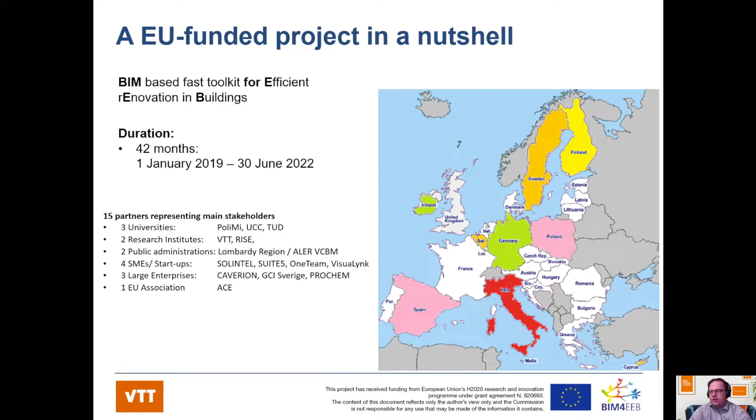So about the project, BIM4EEB in a nutshell. We are creating this toolkit, which is BIM based and aims at efficient renovation. We have been doing the project since the beginning of 2019, and it will end next June. So this is the final workshop

for this Finnish part. The whole idea of the project is digitalization of renovation. As said, it's a BIM-based toolkit, and tools will allow 3D digital models of existing buildings, utilizing that, and there is the common data environment, the BIMMS, in the background connecting those other tools.

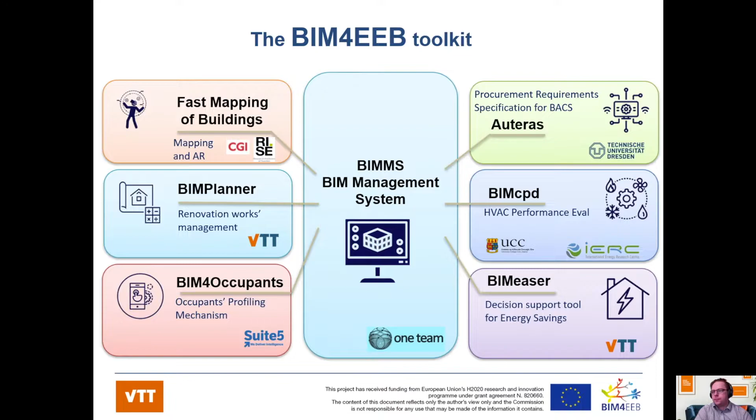So in the first phase of the project, that is the toolkit. We haven't used all of these in the Finnish pilot, so today we are talking only about the BIMMS, BIMPlanner, BIMeaser, and fast mapping toolkit. In the first phase, we defined requirements from the user's perspective, from different companies, and also defined the linked data and ontology approach used in the tools. Then in the second phase, we developed those tools, and the third phase was testing them in the pilot sites, one of those being the Finnish pilot, which we are talking about today.

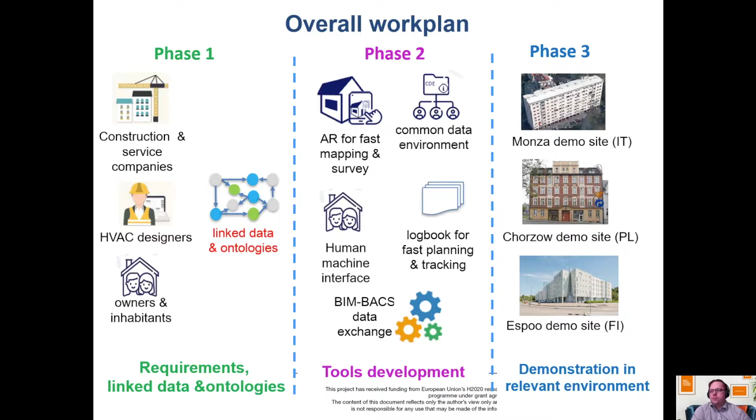And that would be my short introduction to the project. So then I would give the floor to Olli, who would tell us something about the Finnish pilot.

Hello, I'm Olli Nummerin from Caverion, and I hope you can see my screen now. Sorry for hassling a little bit with my buttons. I will tell a few words about the Finnish pilot site.

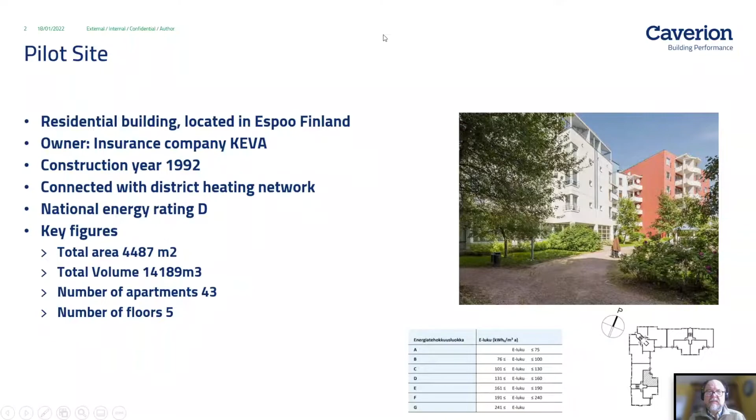So for the pilot itself, our objective was to reduce primary energy consumption by about 50%, and to do that with minimum action, so with minimum cost and only the necessary things needed for that. In practice, we decided to install an exhaust air heat pump.

That's the system where, in this kind of building, we have exhaust air collected at the roof of the building, and the new system is recovering energy from that air, which is constantly about plus 22 degrees all year round. In Finland, that's a big advantage compared to the traditional heat pump, because during winter time we can recover heat from indoor air, but not from outside.

And that system runs in parallel with district heating, so we can use district heating still during peak demand and for domestic hot water, but for the heating we are mainly using the heat pump.

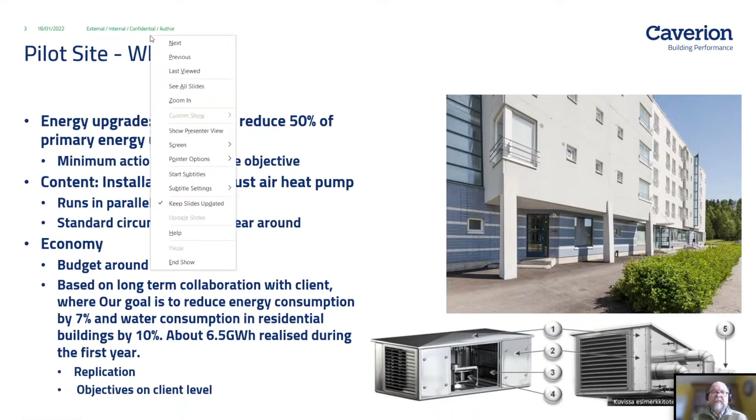And for the source data, we started to find documents for the building - typically there's drawings, original drawings. It's a pile of paper, and that was the case in this building as well. We created an IFC model based on the original drawings and modifications that we provided for this building.

This IFC model is used for the toolkit in this project, but we use that information for visualization and for energy analysis as well, so it's not only for the project but for some benefits for traditional work as well.

The data that we are getting there - we know the energy consumption. We have been tracking that for a long time, so we can compare what happens after a renovation.

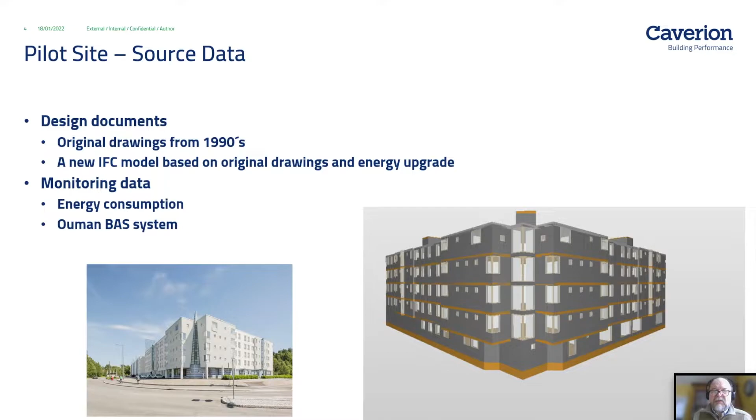So that's the pilot building, and I'm happy to answer questions if there are any. Thank you. Perfect.

We start with the BIM management system. The BIM management system is the core of the BIM4EEB project in terms of managing the data that is inside the project and integrating the tools that will be presented after my presentation. The main goal is that optimal information management is one of the biggest current challenges in the construction industry.

We also know that the amount of data generated by a building asset during its entire life cycle is massive, and this could be an issue and could hinder strategic decisions. With this in mind, a common data environment, or CDE, works as an agreed source of information, which can help to collect, manage, and disseminate all the information through a managed process for the entire building.

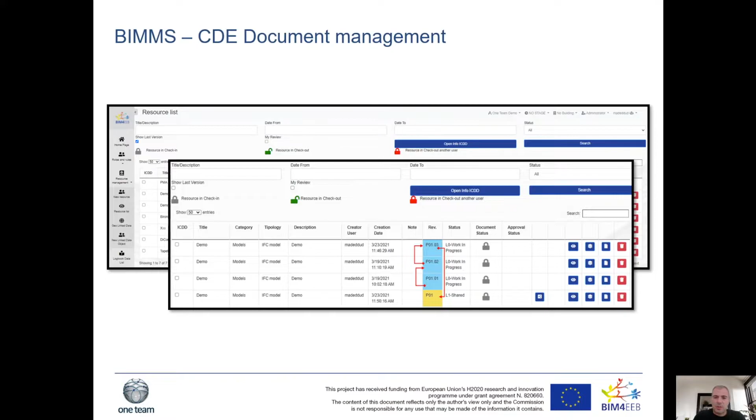We have a lot of functionalities that allow sharing data with other users, tracking changes through revisions, tracking changes of document status, and being aware of the models. As you know, BIM processes are very important, and the BIM management system supports BIM.

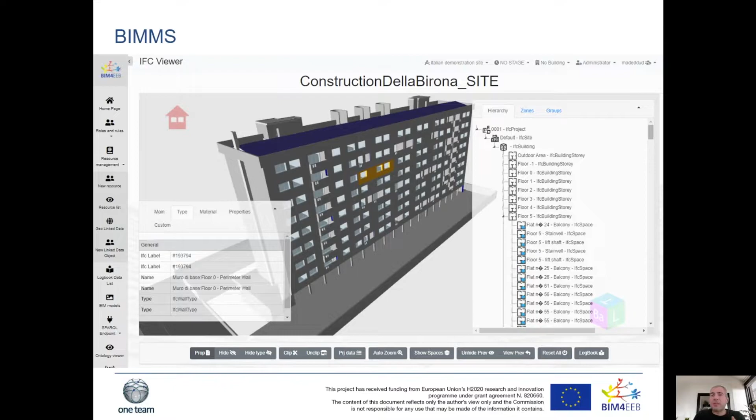It also gives a BIM viewer that allows users to see the building and navigate through the hierarchy of objects and elements, see the properties, and see all the data that could be attached to these items.

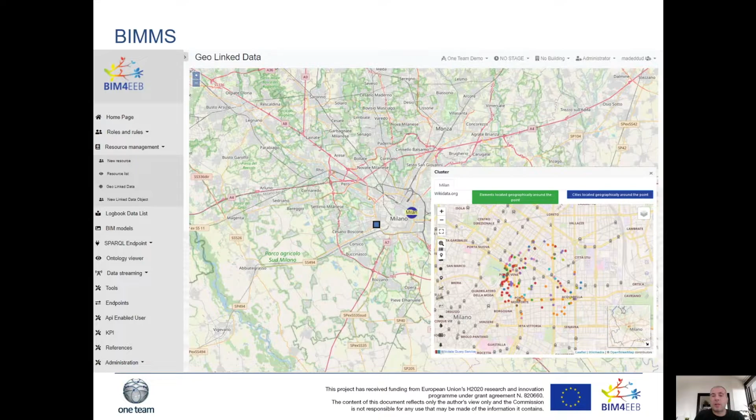Another important feature is seeing where the building is located, but also where all the resources of the building are located. These are components of GIS technology, so we can see the data in terms of geographic location, and also see, as we'll see in the next slides, how this data could be connected to other data.

IoT information, for example the temperature inside apartments, could be seen there. Obviously there is a private system so not all users can see the data coming from the apartments, just the users that have permission to it.

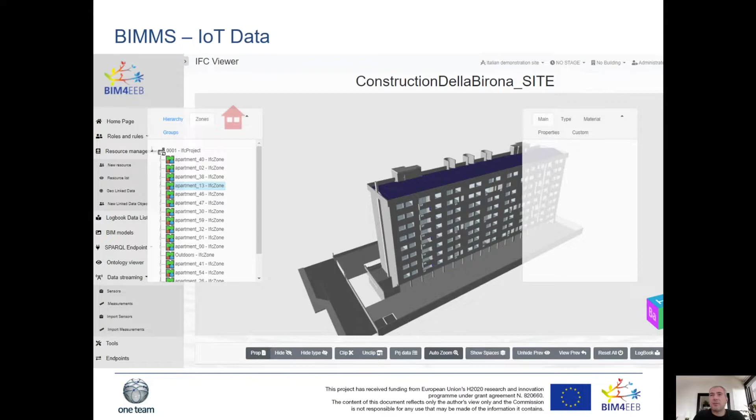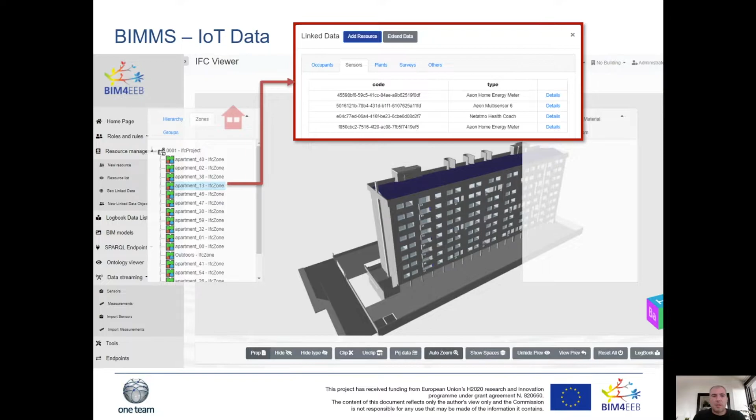This data could be seen as tabular data, but also in an easier way, where you can select the apartment and see, for example, all the components of the sensor measurements at a precise time.

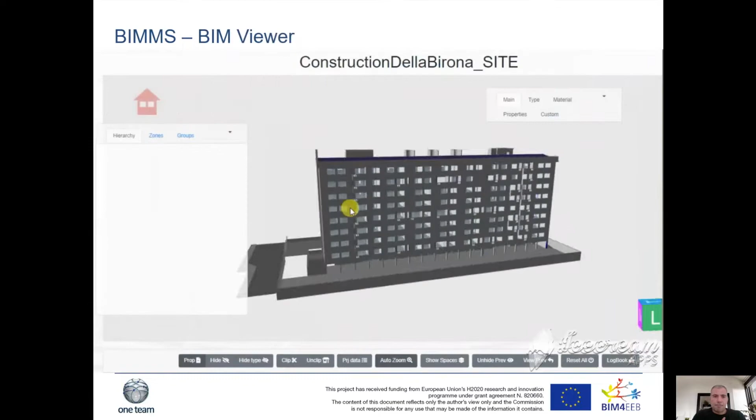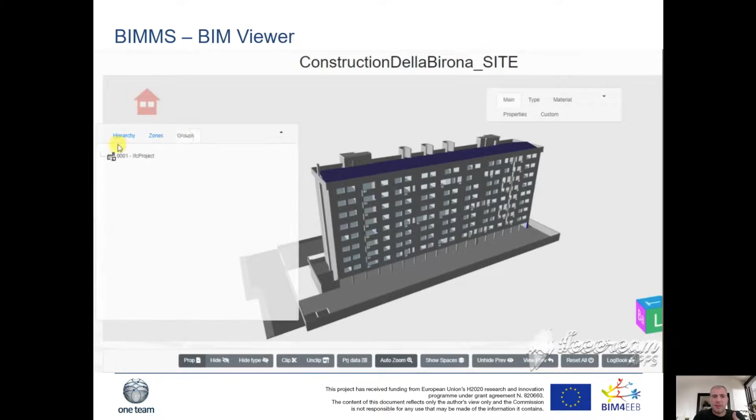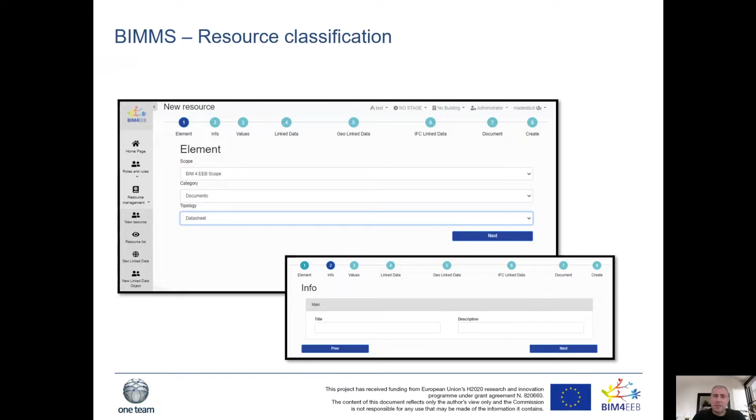Another important thing is that the user can navigate through the model and see all the information needed. This is right for the design phases, but also for the operational phases. If you are, for example, a real estate manager, you can check how the building is doing and how things are going.

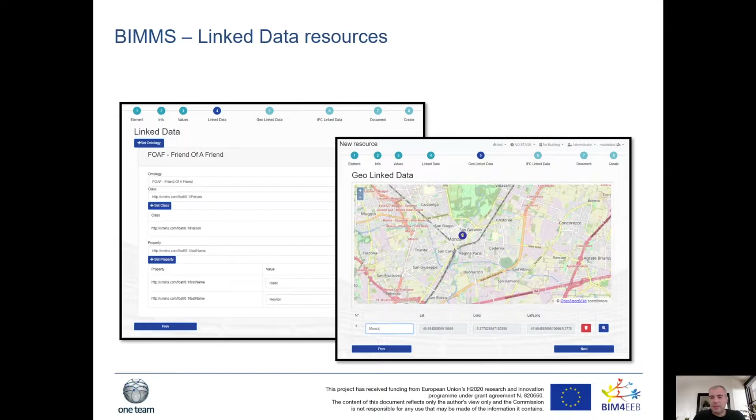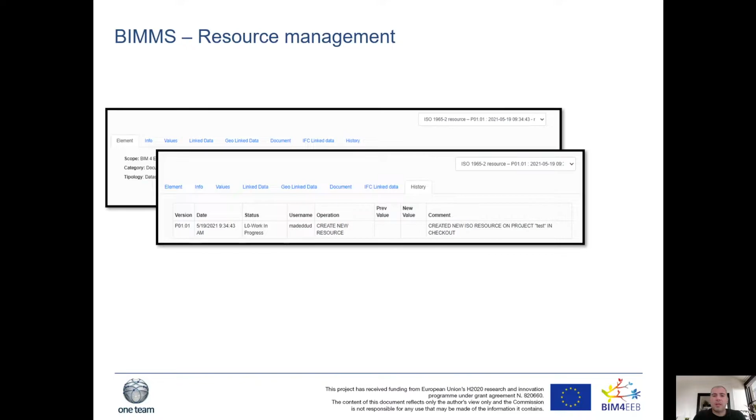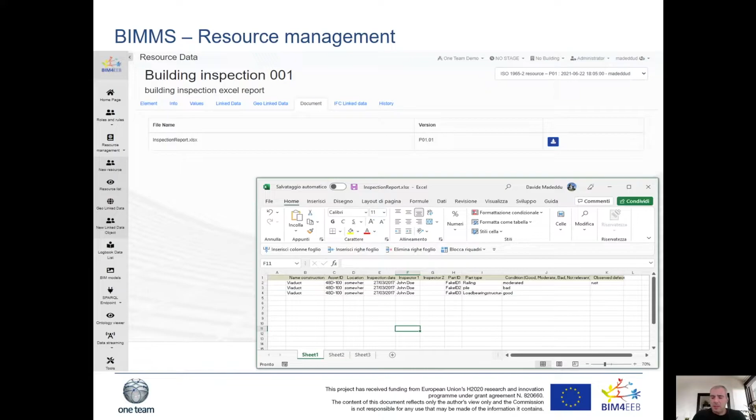We have a classification system that helps find resources, and some functionalities linked to linked data resources. There's a special feature that reports linked data functionalities in-house, and some things related to the data associated with documentation, any kind of document that could be stored inside the system. Obviously there is also a connection between some of the most used applications among professional users.

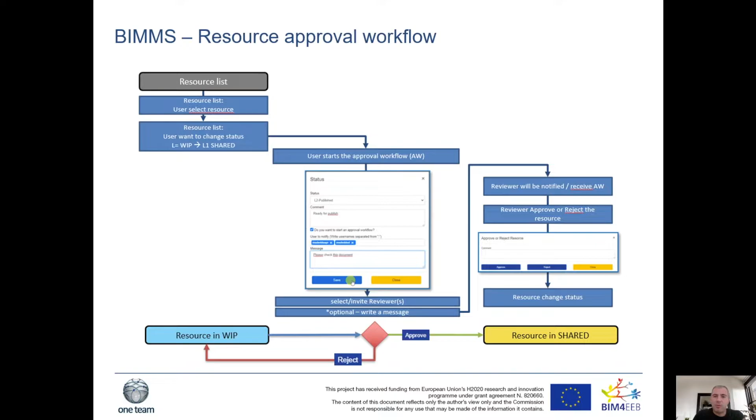Another important thing is that information is most important, it's important to take track of changes, for example the approvals in one document, to see the step-by-step evolution of the documentation, and collect the feedback, collect the approvals, if a documentation is ready to be shared with any other.

Another important thing is about the building logbook. This is important, especially for managing an operational phase, when you have to check all the data of your building in time, historically registered or recorded in the database, to see where the changes are. For example, when you change the last heating equipment, this data could be stored entirely in the BIM management system and can be shared with the people that are interested.

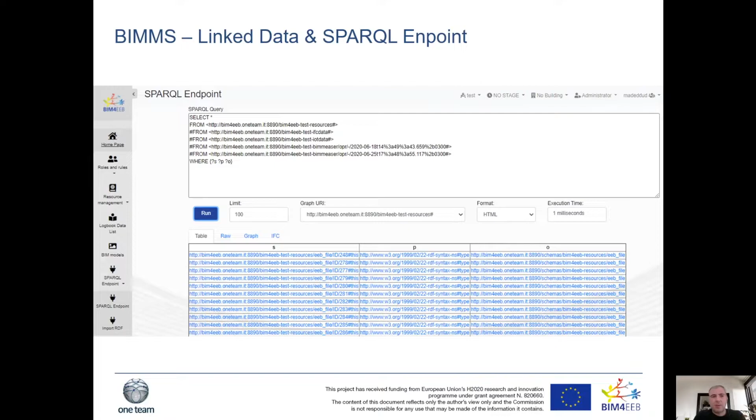All the data could be searched in a special case using linked data features, and especially a SPARQL endpoint, which is a very powerful system to check the data about the linked data. One of the most used and precious features of this functionality is that all the data you can store in the system can be connected and linked with external resources.

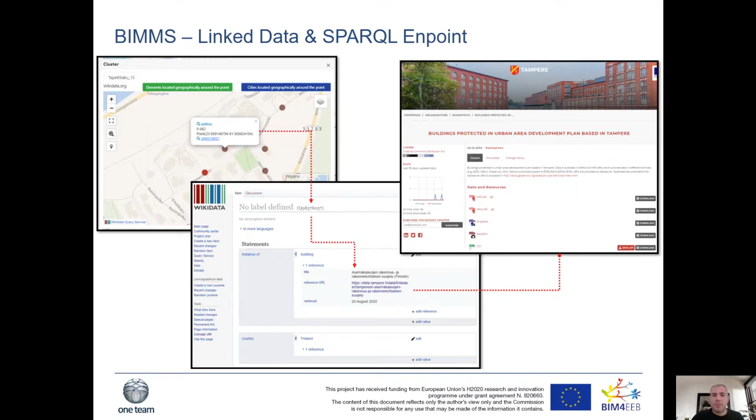For example, for the city of Espoo or Tampere, or any location present in the BIM management system, you can search for any other information that could be useful for the building. For example, you can see which buildings are near your building and if there is information available to recognize something interesting for your building. This could be helpful for designers, but also for any technical leader working on your building.

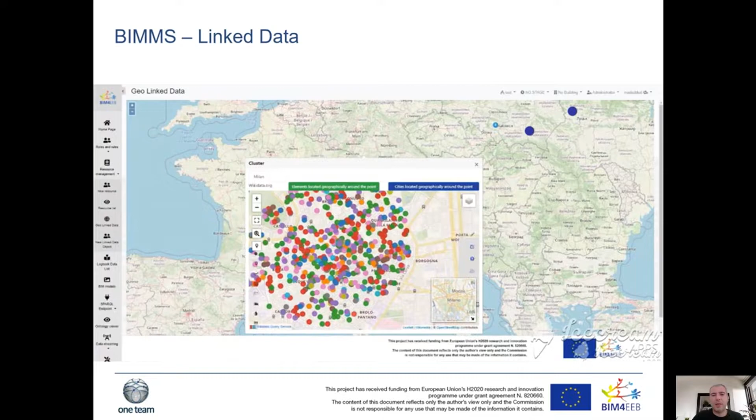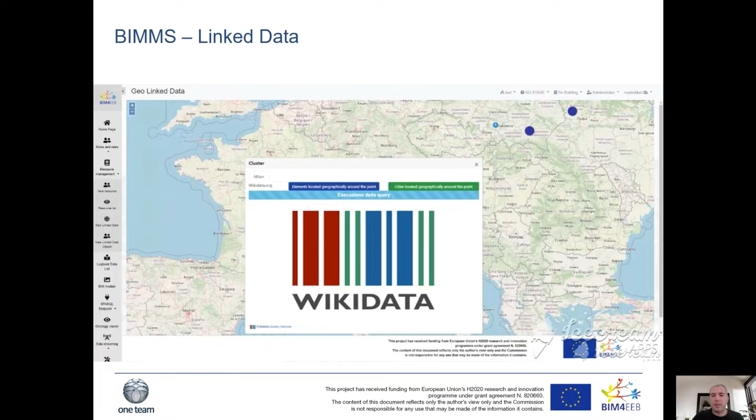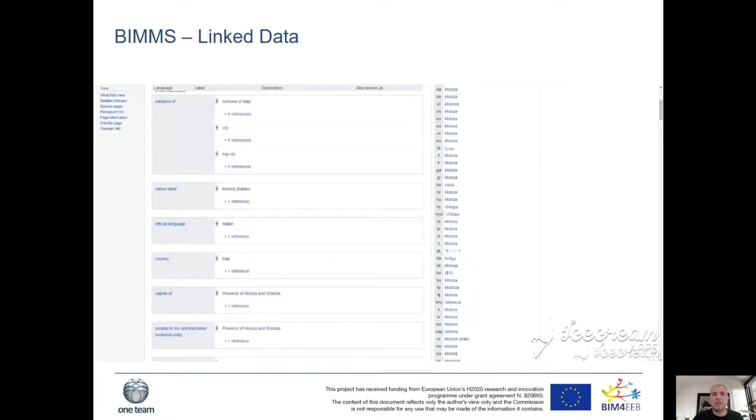A practical example of this functionality is located here, not as a video for the Italian demo site, but it could be applicable for any location stored in the BIM management system, where you can see that your building could be in Milan, for example, but you can see other buildings, other information available near our building within a circular kilometer radius. This information could be reached from other resources, and it could be something we can call augmented information for the system.

Just one last thing, so as not to go over too much in this presentation: we have some functionalities where this data is stored in the BIM management system but is available for any other tool. We have an API that could extend and integrate other tools inside the building management system, and this allows data exchange between tools in a way that is much faster than before.

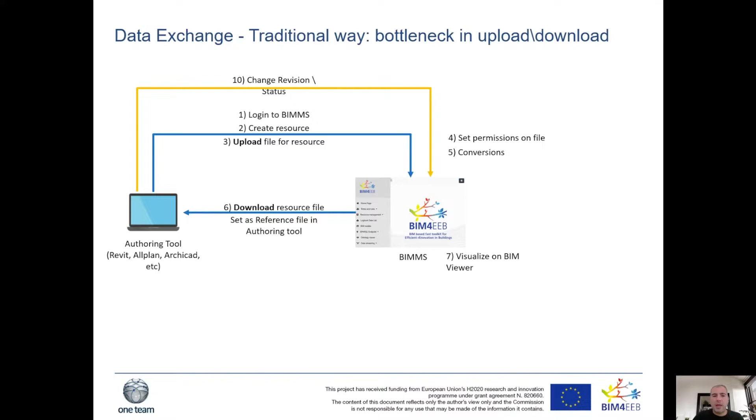A bottleneck in the process is so much in upload and download features, documents, and so on, which could waste time for designers and every professional working on documentation of the building. We created a system where you don't have to exchange the same file every time, but you can just upload your resources the first time and then just integrate only the data.

For example, if you have a building model in IFC, you just have to upload your BIM model the first time, and then if you have to change something in the data inside the BIM model, you just use the API to update the system. This can be a very powerful system that reduces operating time on your model by about 17%.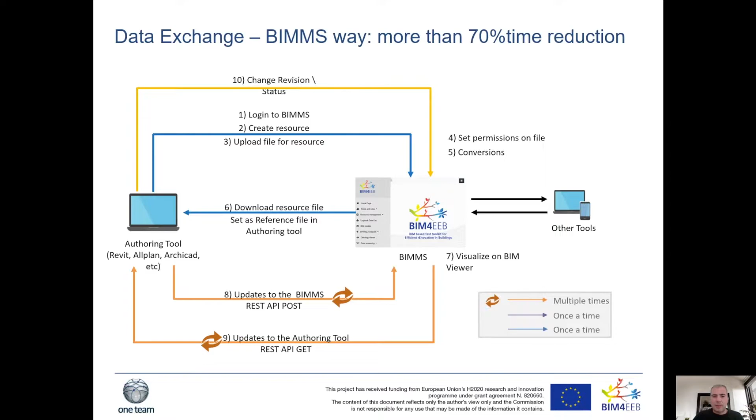And then I don't know, Teemu, if I have some more minutes to spend on that.

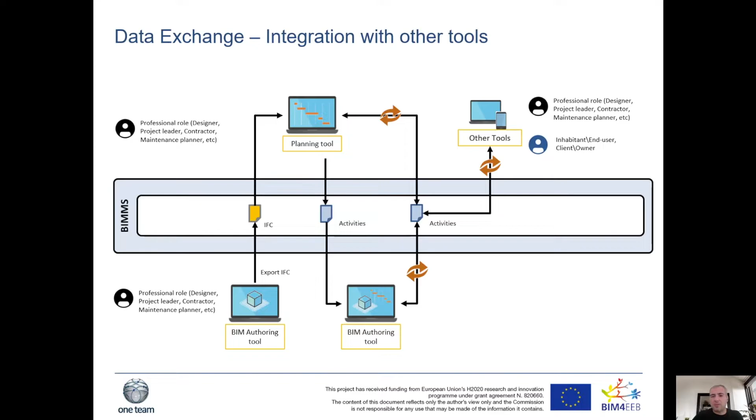The other slides are about this kind of process that the BIM management system allows, to exchange data between tools. The next tool you see in the presentation works with the API of the BIM management system and can exchange data with it. It's an integration with the most common tools used by professionals.

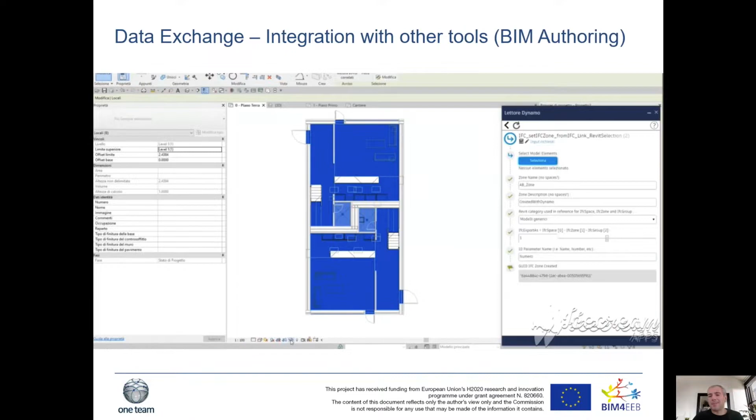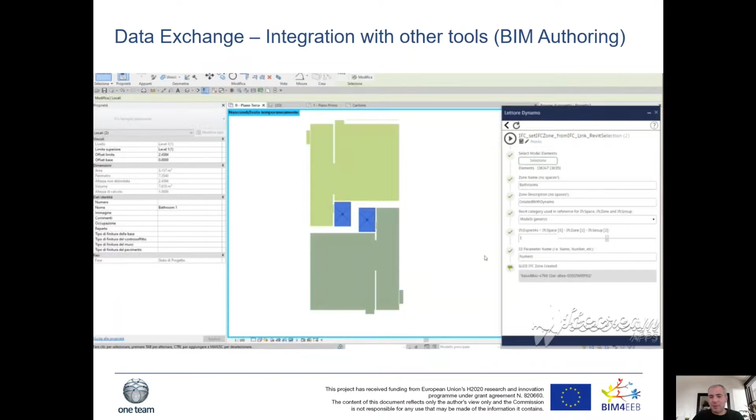And yes, this is my last slide. I hope I gave a good overview, a good presentation of the BIM management system. I leave the stage to you.

I will, can you just... Yes, I can see it. There I am. I'm from Sweden, working at the Research Institute of Sweden, and I will present today the part in this BIM tools which is called fast mapping tool.

The object and goal of this tool is to more easily obtain documentation of the construction of an existing building, and also get more information than you normally have when you create your 3D model and have the geometry, some construction parts, and so on. When you have this 3D model with more information, it's easier to understand the construction when you see it in the 3D model.

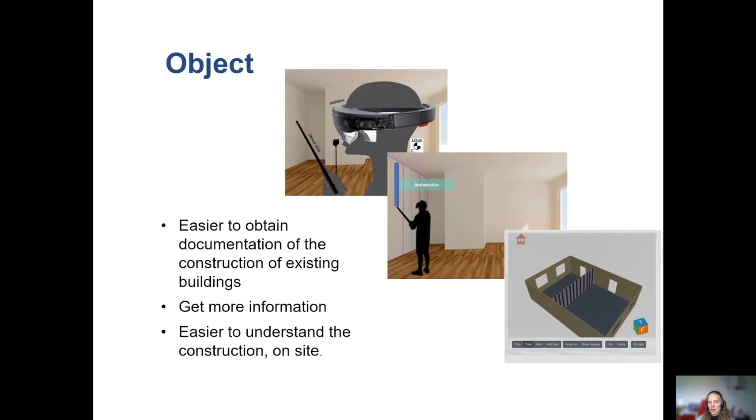So how does this work and what is it? The first step is that you scan the apartment or room with an ordinary laser scanner, as you see in the first picture here. This laser scan creates a point cloud, as you see in the lower picture. This point cloud is, because it's dead information, just points, the computer doesn't know if it's a window, a wall, or a floor, or what it is.

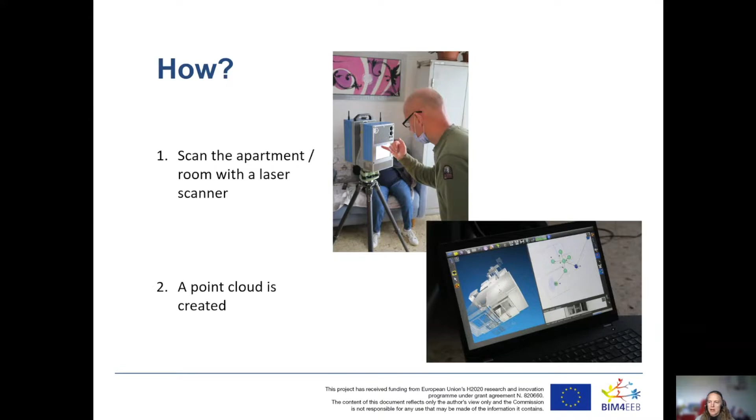And there the toolkit comes in.

Because when you have this scan and you have the point cloud, then you can put on AR glasses, augmented reality glasses, and upload the point cloud into the glasses. So when you put on the glasses, they're transparent, so you can see the room, the apartment, and then you upload the point cloud, and that's what you see in the lower picture here.

You can see this is a wall with a channel of cables. To the right in the picture, you see just the wall. To the left, you can see it's a point cloud together with the real wall.

When you have this point cloud in the glasses, then you can very easily add with your finger and define what is what. So you can point on the wall and say that this is a wall, and you can point on the corner in the floor and say that this will be a floor, so that the computer knows what it is.

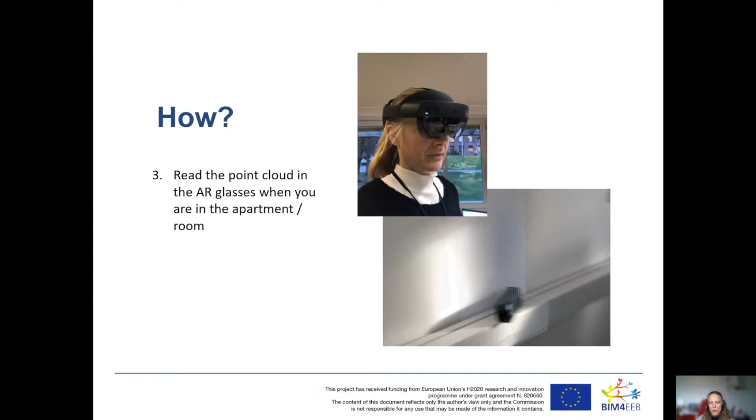And then you have another thing, which is the one I like most, I think. It's when you have this, then you can connect what we call a sensor stick. This is developed in the project, so this is nothing that exists on the market at the moment. This sensor stick is like a normal sensor.

For measuring moist - you know, when you detect the studs and moist in the wall, it measures capacitance, inductance, electricity, and temperature a few centimeters into the wall.

The good thing with this is when you sweep this sensor stick over the wall and have the glasses on, you can see this little screen or layout in the glasses. So you can see what the sensor stick detects - whether it measures high capacitance, inductance, electricity, or temperature.

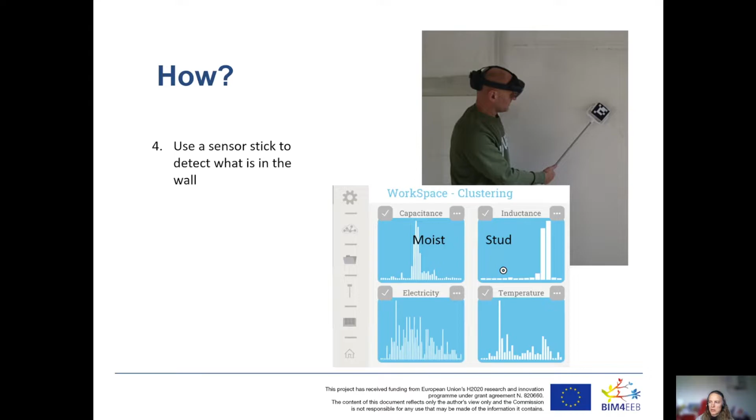What it measures, you can detect as a color. So what you see to the right here, you see different colors. It's colors added to the point cloud or to the wall - one color for each measurement.

So when you have the glasses on and you see the different colors, you can say that probably you have a cable here and you have a stud here, or maybe you have some moisture problem or some area which has an air gap behind it or something. And then you can easily point with your fingers and say that here it is, and here it is, and here it is.

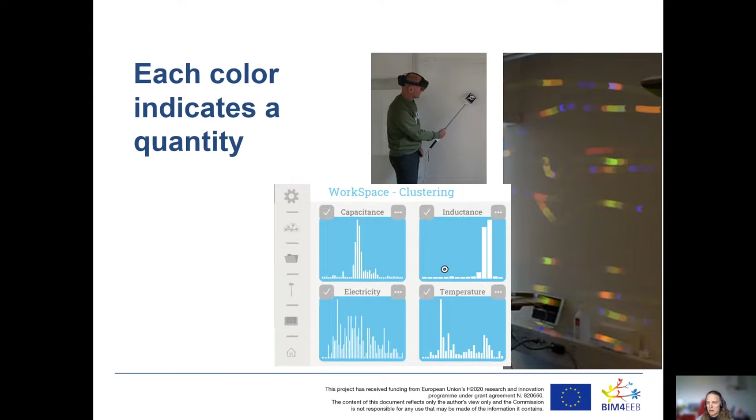And this is what I have done here - I have just indicated where a stud could be.

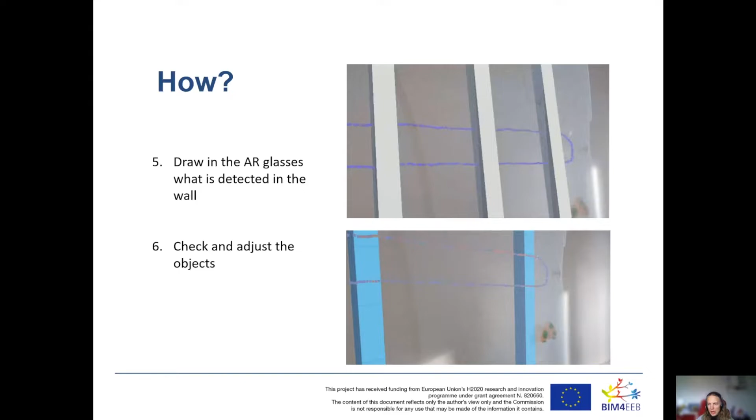I can say it isn't really as easy as I make it sound, because when you detect it, you have to be careful and see that it's in line with the point cloud. You see in the first picture here, the beams are tilted a little, so you have to adjust them so it becomes correct. And once you are satisfied, it's possible to create an IFC file that could be stored in the BIM model that you saw previously.

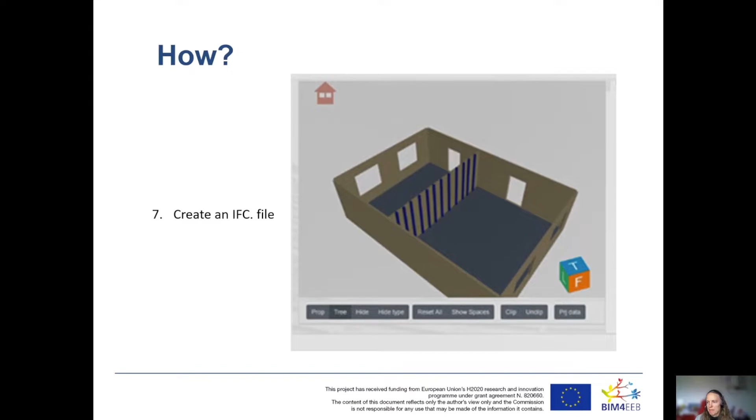This is new. What is existing today? The laser scanning exists today, and also the AR glasses - that's possible to buy on the market and use. What's new in this project, what we have developed, is the sensor stick and also the software. So this is a tool which is demonstrated in this project, and it will need some more development before it becomes a good tool on the market.

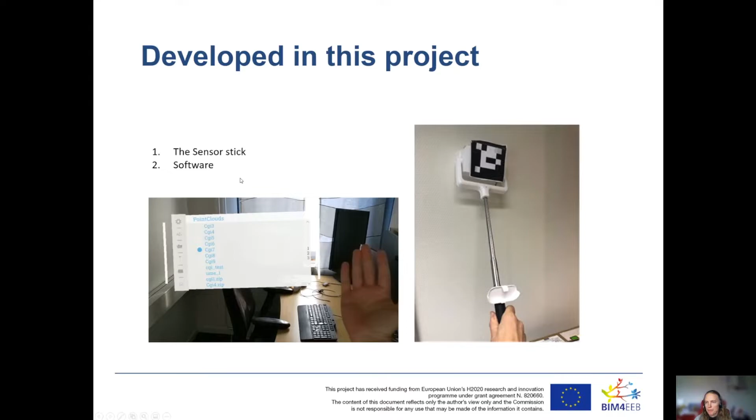Next week, this will be demonstrated at your demo site in Finland on Tuesday. We have booked it, and then we will do a laser scanning of one room, or maybe two rooms if we have time, and it will produce a point cloud, and we will also do mapping with the sensor stick to see what we have behind the walls.

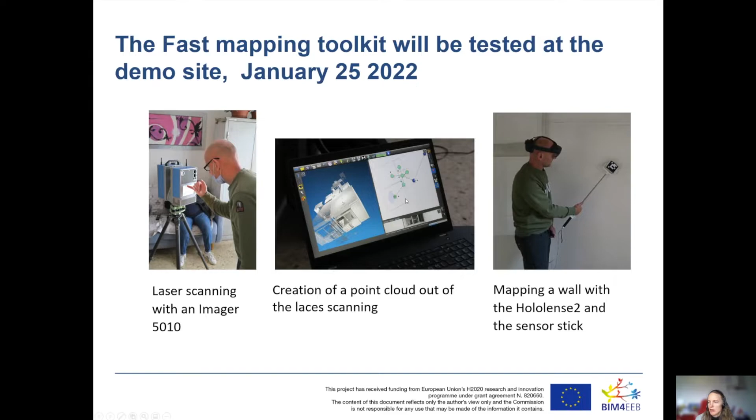Okay, I hope you can see the presentation, which is about the decision support tool, BIMeaser. My colleague, Jari Shemeikka, has been a key person in this development work. I have also worked with this, but not that much. But unfortunately, Jari was not able to join today, so he prepared most of the slides, but I will show them today to you.

So BIMeaser is the early stage energy scenario tool, and the idea is to create a decision support tool for early design phases. The main functionalities of the tool are to model the so-called as-is energy and indoor climate model of the building, to represent the baseline energy consumption before those renovations.

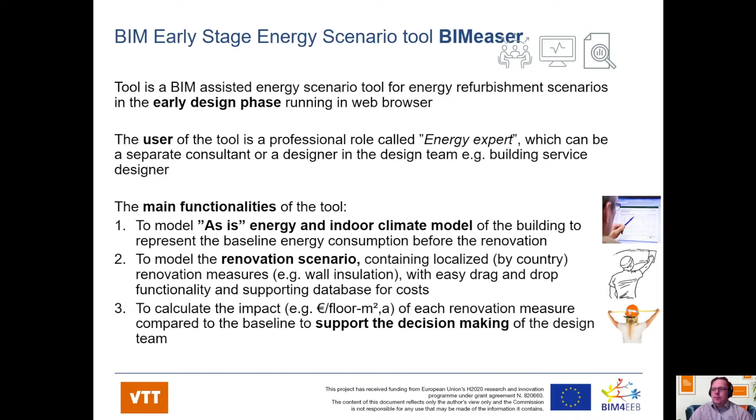That is based on the data that we get from the BIM management system. Then the second functionality is to model the renovation scenarios, which also get data from the BIM management system, but also supporting national databases that have the actual cost for those renovations. And then finally, the tool calculates the impact of each of those renovation measures, and that's how the decision can then be made as to which is the best option.

So if you look at the design or renovation process chart, there is of course increasing amount of information in the process, and in the end it is common to use those sophisticated energy simulation tools. But in the early phases there is a gap in the information that is needed for those tools and what is available, and that's the scope of our tool to improve.

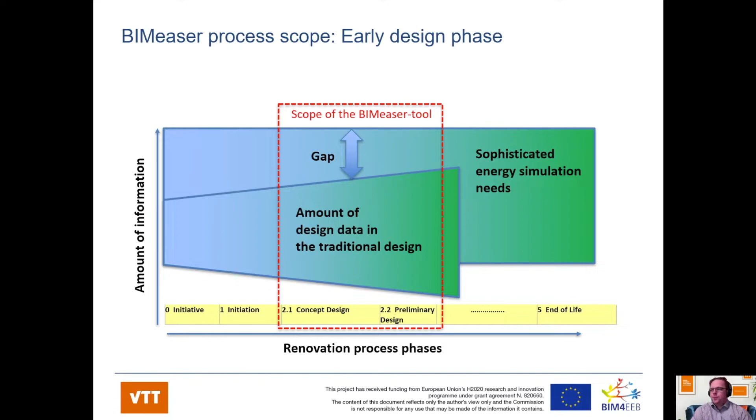The basic workflow is that there is a design team and a specific user, an energy expert in that team, and he will be the one using the tool. The content for the as-is model comes from the BIM management system, and a building energy simulation model is created with that.

Then there is this BIMeaser tool that also gets data from national databases, and those scenarios are created and sent to Energy Simulator, which is a commercial software. So we didn't reinvent the wheel for that, but used the existing IDA-ICE simulation tool. And as a result, BIMeaser will provide these owner's project requirements.

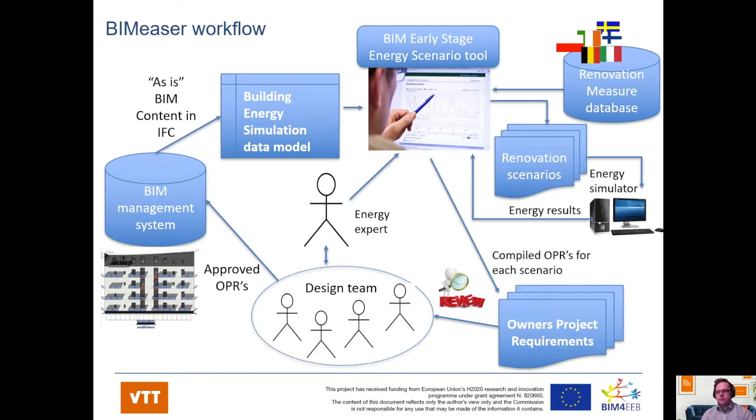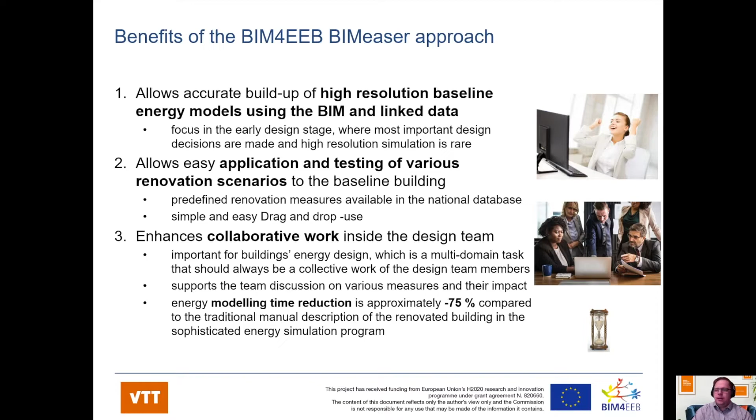Benefits of our approach are that it allows high resolution baseline energy models because it gets better data. It comes automatically, and it allows application and testing of various scenarios in those early phases, and it also enhances collaborative work inside the design team as those scenarios can be evaluated quickly.

These are the actual OPRs, so owner's project requirements that we are calculating. So energy savings, comfort, and cost.

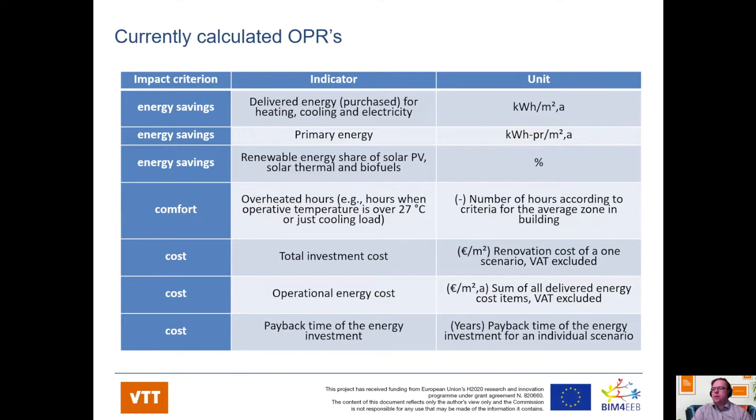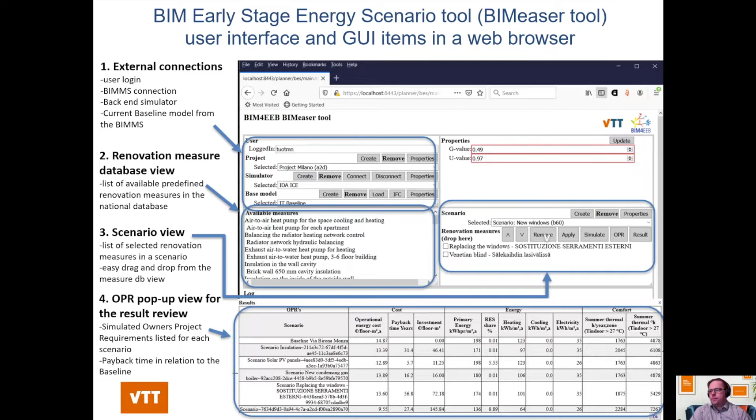And that is how the tool looks. It is used in a browser window. There are external connections, and then those renovation measures and scenarios are defined. Finally it will provide this table of OPRs. That is how the national database looks like in the browser window also, so the data is collected there like this.

Our case study here was the older Finnish pilot. As Olli mentioned in the first presentation, the Finnish pilot was changed during the project, and as we were working in the early phases, we already tested our tool before the pilot was changed. This was the previous site, pretty much similar to the one that was actually implemented, but this was also about the installation of a heat pump. So the energy saving measure there was this exhaust air heat pump, and we estimated the price for that.

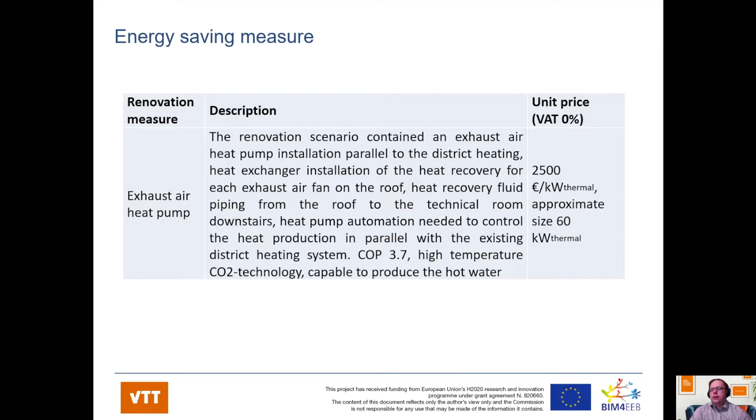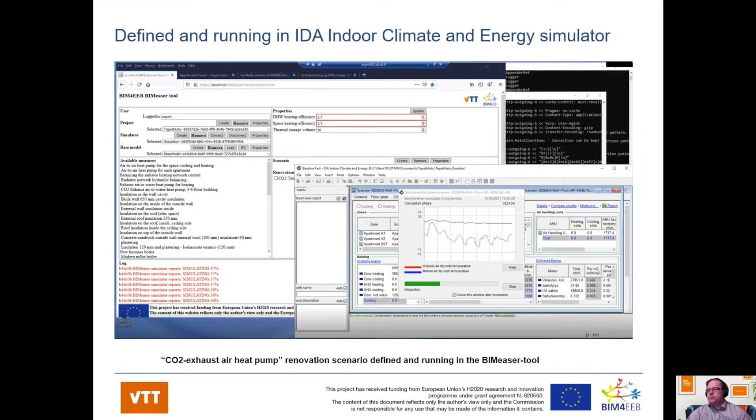And that is how it all looks when it is simulating in the IDA-ICE tool. And here are the cost, energy, and comfort indicators that were calculated in the evaluation.

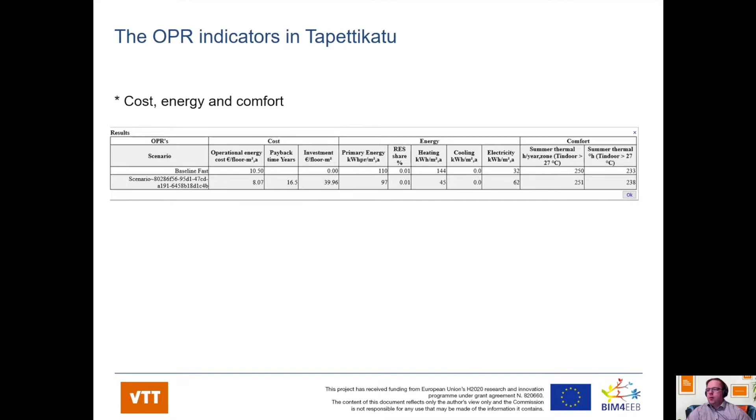So the final result of this tool, it was clear that it will reduce a lot the modeling time versus manual modeling. We actually clocked that, having one expert trying to do the modeling work as it is normally done, so collecting the information manually and putting it into the simulation tool. Then we did that another time with another expert who used the system developed in the project, the BIM management system and BIMeaser, to create the model, and we were able to get this 80% reduction in this pilot.

I think it was 75% reduction in the other pilot, and especially it is this build of the as-is model, so the first model for baseline simulations, that went much faster with these tools.

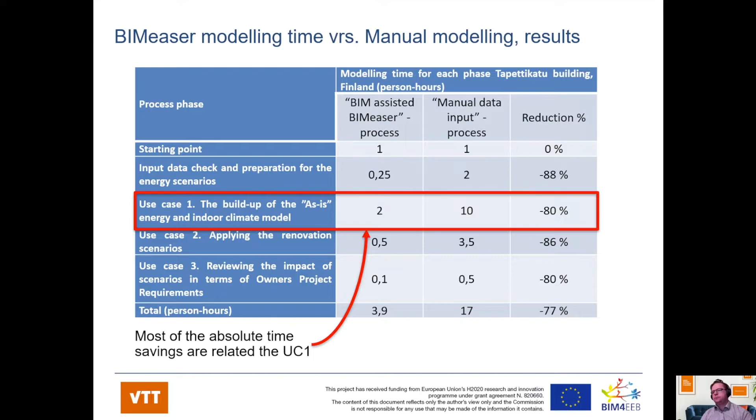As a summary, the tool worked nicely, and the demonstration was successful with this decrease in the modeling time. In our opinion, it clearly adds value to the work of design team in those early phases. Maybe some development ideas that we got in previous workshops was that the simulation could be faster, so it could be a cloud service with a lot of cores to do the simulation, that maybe would help it go through faster. And when we are doing the baseline model and it needs to be calibrated to match the actual measured consumptions, maybe there could be some artificial intelligence-based calibration algorithms to automatize also that part. But maybe some other project will work with those then.

That's what I would like to say about BIMeaser. Maybe again we have time for a short question if needed, or you can put those into the chat.

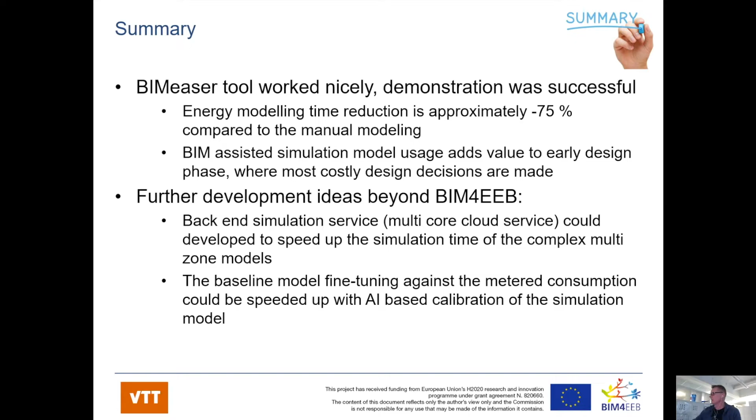So this, what we call BIMPlanner, is one of the tools developed in this BIM4EEB project. As briefly described, it is a cloud-based scheduling software for detailed planning and tracking activities, especially at the renovation site. And we think that it is based on this so-called location-based construction management method, where all the activities are scheduled to certain location, work location at site. And we think that in renovation projects, where there might be occupants at the site environment, it would provide some safety information, but also possibilities to indicate of coming disturbance from the construction work. That was our initial idea for this tool development.

The other development domain here is that we are using this linked data approach. We store all the data as so-called triplets in a graph database, which is not a new domain, but application in construction management is quite new. And I will later explain why we have tried this kind of approach.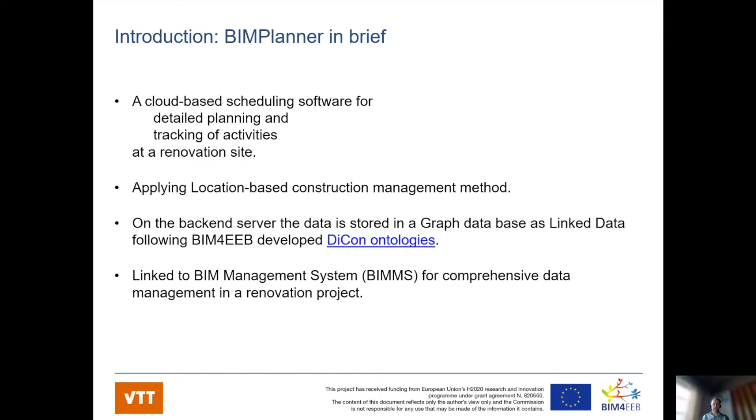As I said, the tool is based on this location-based construction management, where the idea is that the activities are flowing through the different work locations, and we could define the timing for each work location. So it will conclude in more detailed planning, but also possibility to track is the activity in certain location finished or not. And with this approach, we link those work locations with the BIM model. Then we do know where actually the work is going on in a geometric sense in the site coordinate system.

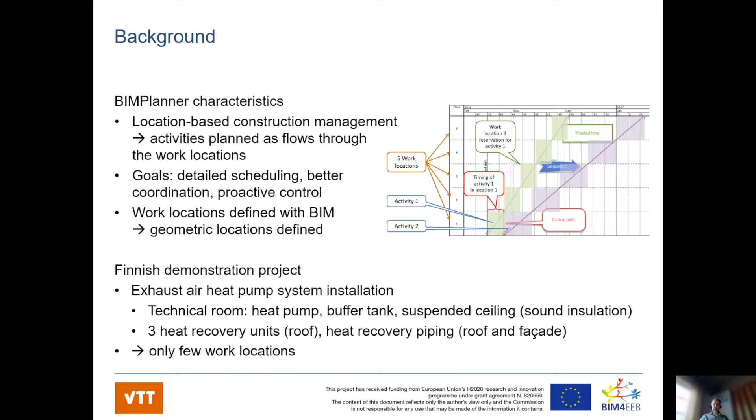And this Finnish demonstration project, as Olli earlier described, it is an exhaust air heat pump system installation. But in this case, it is not a very large activity. It has two or three major locations where the work is done. The most crucial is this technical room, where all those equipments are installed indoor. Then we do have need to work on the roof. There are 3 heat recovery units on roof, and also this needed piping to transfer the collected heat from the roof to the technical room for the heat pump. So in this sense, this location-based management may not be the best demonstration environment, but I show what we have done and reached.

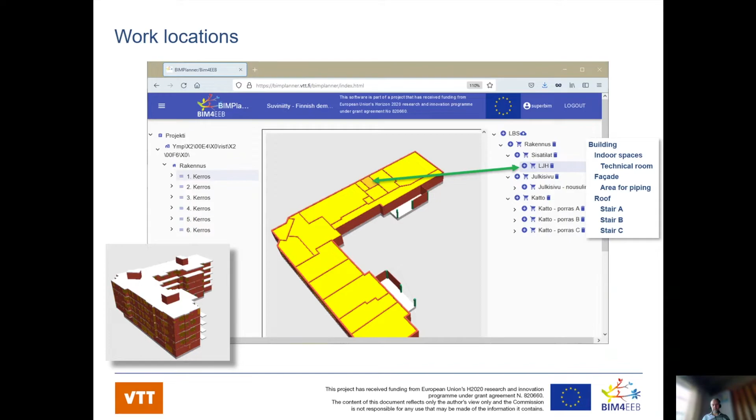As I said, we do have in this BIMPlanner a user interface for defining those work locations, and there are just a few locations in this case. We have this technical room. We have in the facade some area where the piping is going on, and also we have some locations where the heat recovery units are installed on the roof. But even though here are 3 different locations where these recovery units were installed, we made the planning just for this roof as one work location. We did not divide it into those 3 locations, because there are some activities that during the same day the worker could make some installation for each of those units.

We had a master schedule that was agreed by the client and Caverion, and also the subcontractor who implements the activities at site. I'm not sure how clearly you can see the fonts here, those might be quite small, but briefly, if I go through those, there are some deliveries of the equipment to the site. There are some construction work. There are these heat recovery installations, piping, unit installation and connections. There is MEP installations, mostly the heat pump, and related electrical installation and building automation and control system installation. And the total planned duration for these operations at site were those 13 weeks.

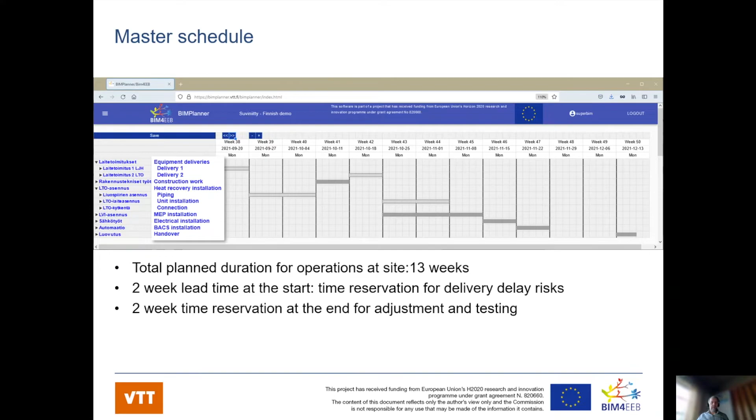And there were some reservation buffers in the schedule. There was in the start and end about 2 weeks for managing if something goes wrong. And if we check the implementation, here was the construction work, which actually was an installation of suspended ceiling in this technical room, because there were expectations that some improved sound insulation shall be applied, and it was firstly installed in the technical room. Before that, there was need to make some removal for the electrical installations in order to be able to make this suspended ceiling. And it was planned and actually implemented in time.

Then at the roof, these heat recovery installations were probably the biggest problems in the work. The most crucial work has been this piping installations on the roof and also in the facade. It took about 2.5 weeks time. It was finished in the latest plan, but there were some problems to reach and apply some components in the facade, and it was in that sense late compared to the initial plan for these installations.

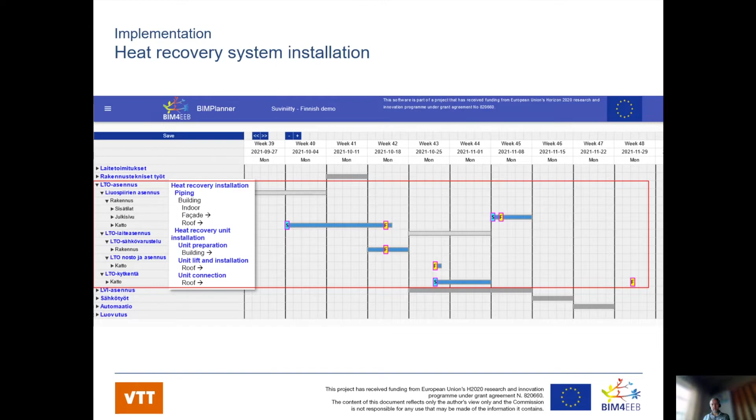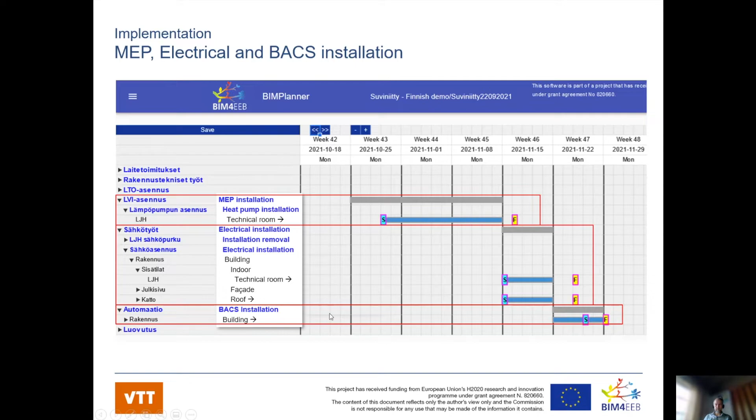The works in the technical room, the heat pump installation, the related electrical installations, and building automation and control system installations were implemented in time.

If we check the total schedule, this might be too small font to see, but we can recognize these light blue or gray areas in the start, middle, and end of the project. They are some lead time that could be left out if there is a need to reduce the total duration of the project.

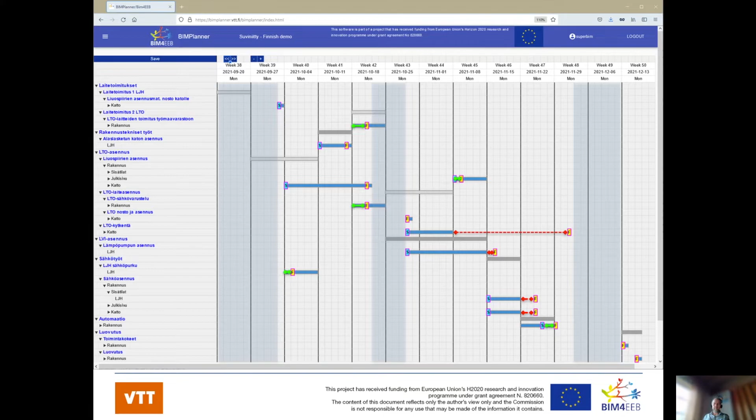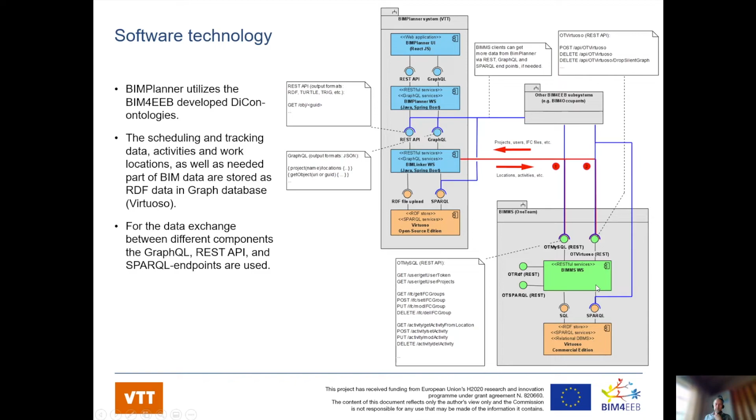As I said, this has been for us also, let's say, computer science, not research project, but development project. We do have invested in developing this system where the data is stored as linked data and also communicating with the BIM management system. And just to motivate that, our idea is that in one day we could make all construction project data available to create a common understanding where all work are going on.

In this BIMPlanner implementation, we applied some areas where we could provide this information, I would not say standardized, but in a systematic way, following these BIM4EEB developed DiCon ontologies in order to create some other added value on the data that is produced on BIMPlanner.

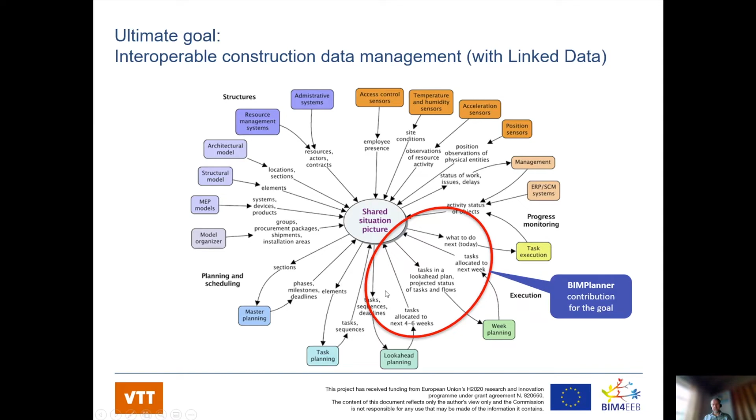And of course, we had some, let's say, defects and findings and surprises during those discussions. We have found how we need to improve BIMPlanner.

We have some thoughts how this kind of project may be managed, because it seems that this is not a typical renovation project. It is too small, too short duration project, but on the other hand, it is not related to maintenance and typical repair work that Caverion is also providing to these clients. So there is need for some, let's say, streamlined process for such projects.

Because it is quite obvious that such system installations, there is a rising demand in the future in order to improve the energy efficiency. Thank you for my side.

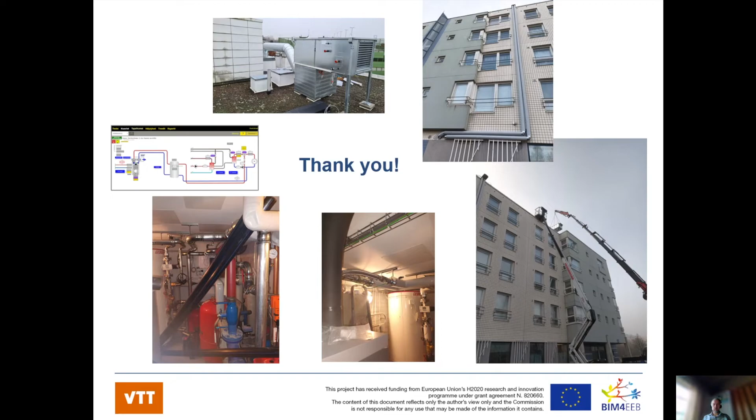Okay, so that's our schedule. Next we will start the interactive part of this workshop to really work on something together. So I will introduce the tool very quickly first, then we will have a 5-minute break, and then continue with discussion and feedback on this tool.

So we will be using this Miro tool for this feedback collection, and the full board will look like this. So I will copy paste the links to the chat. You can find them there. There is a link for the full board, and you can also use the direct links to each of these tool parts.

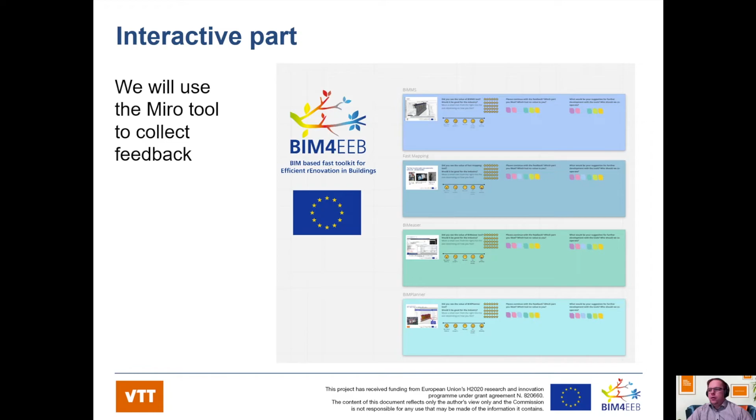And something about Miro. No registration is needed. You can just click the link and skip the intros. Maybe it will offer you to register first, but that is not necessary. And it will also offer some introduction, but you can skip that.

You can move around in the board by dragging the full board around. So just hold the right mouse button and that will work that way. And you can use mouse scroll to zoom in and out in the board. Also if you don't have the scroll, there is this light blue small flag or map in the bottom right of the screen, the same one which is here in the slide. So you can use that to zoom in and out also, and there you can see where you are going in the screen.

There are some tools available in the toolbar in the left-hand side, which is also here on the left in this slide. An arrow in the top of that will move the objects in the board, and if you click that, it will turn into a hand, and you can use that to move the board. But you don't necessarily need to find anything from this toolbar, because these icons and stickers that we will use are already available in the board.

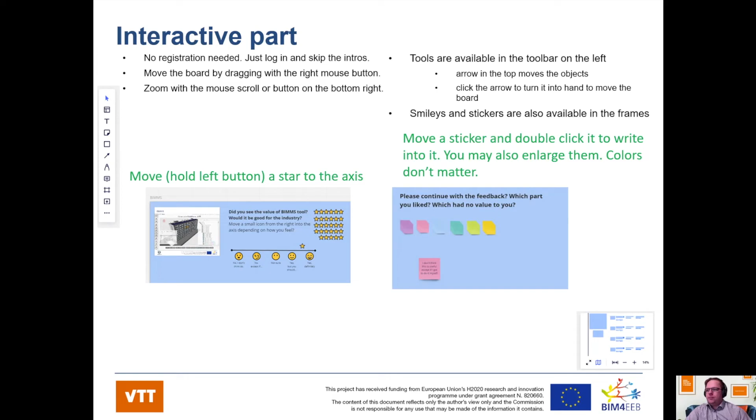But let's look at that after 5 minutes. So now it's good to exercise a bit or grab a cup of coffee.